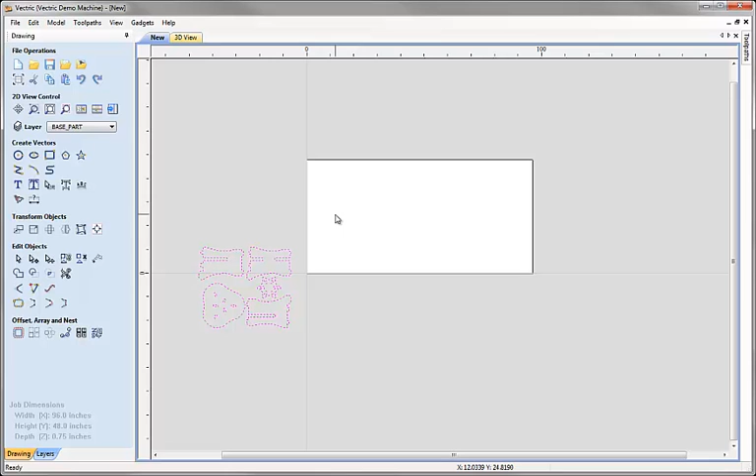Now if this happens and you can't see your data, then the best way to deal with it, assuming that the original position of the data is not critical, is to just center it within the middle of the part. So if we go back to our standard view so we can now see the data that's been imported, I'll show you the process that you'd use to center it.

To be sure that the data was selected, and it should automatically be selected when you import it, but just to double check that, in case maybe you've clicked off the data, you can come up to Edit, select all vectors, and then choose the Align Selected Objects icon from the Transform Objects area of the form, and come up to Align to Material and choose the middle of these 3 at the top here, which will align both horizontally and vertically within the part. And there we can see our data has been aligned in the middle of our job setup.

So we've seen how the position of the part can be affected by how it was saved in the original design system. In addition to that, for DXF and DWG files, you will also import any layer information that the part was saved with. If we come down and click on the Layers tab, we can see the part we've got here, and the three layers that the data is on.

We can tell which layers have data on by looking at this third icon for each layer and seeing if it's got the little shapes on it. That shows me that there's data on that layer. So layer 1 was the layer that we had in the software by default, so if we were to make that invisible, we'll see there's nothing that disappears.

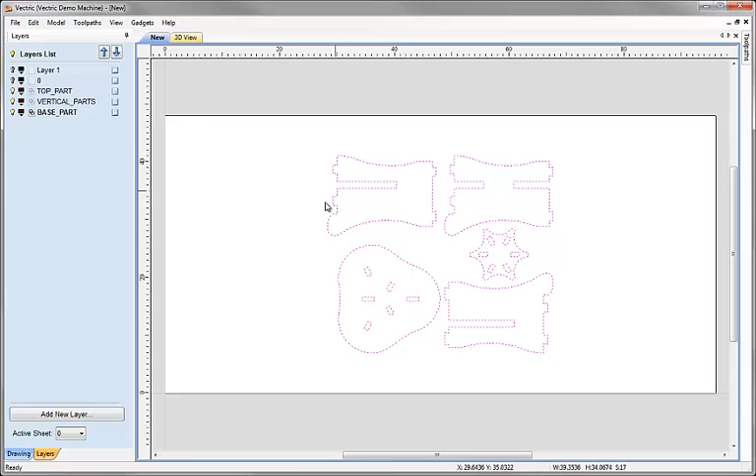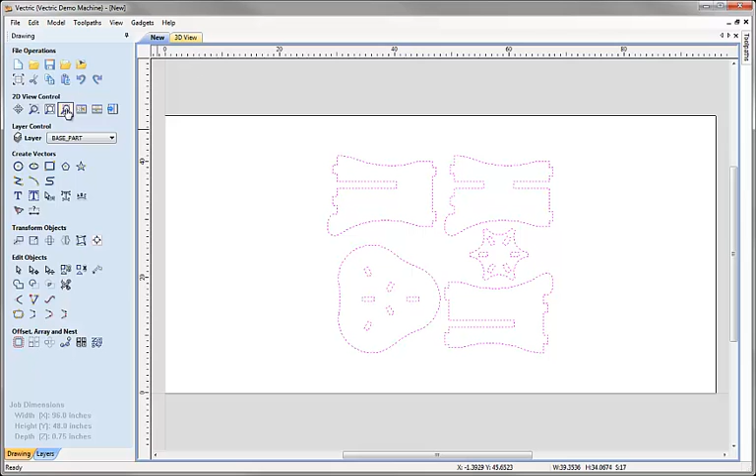So as we're not going to manipulate the layers in this case, let's come back down and click on the drawing tab and let's consider our design. What I'd like to do at this point is just zoom in on the parts I've got on the screen here. There's several ways we can do this. We can zoom in using the zoom box, or because we already have the part selected, I can click on this icon here to zoom selected, and that's just going to zoom in on whichever selected objects I have chosen in the 2D view.

So we'll click on that and we can see that just zooms in nicely on the parts we've got here. If we want to deselect the parts, we can just click in the white space, making sure we're not clicking on any other entity, and that will deselect anything that we've currently got selected.

So the design is intended to be cut out and slotted together. If we just take a quick look at the original design picture, we can see how we've got kind of a mortise and tenon arrangement. Each of these vertical pieces has got a little tenon on the top of it, which is designed to slot into the mortise hole in the flat horizontal parts in order for this piece to slot together.

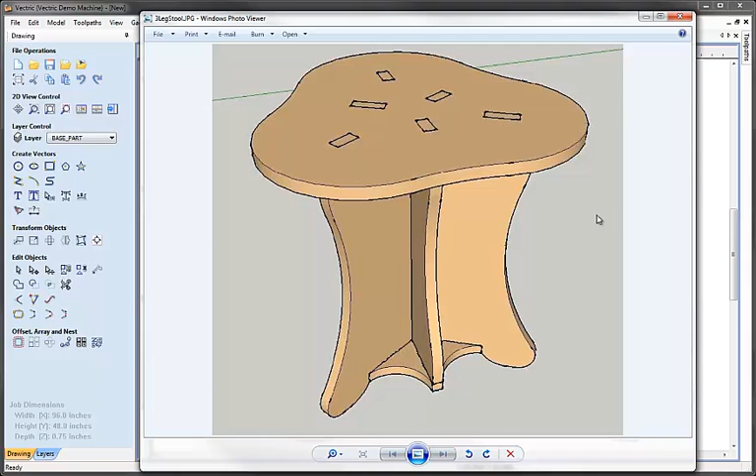In terms of the design, there's one element of this which is extremely important. We've set this part up to be cut out of 3/4 inch material. That means that when we cut around each of these parts, the tenons are going to be 3/4 inch thick, 0.75. That means that our mortise holes need to be made so they will fit together.

So each of these slots has been designed so that its width, its height, as we're looking at this one, is 0.75 inches. If I select that vector, you can see at the bottom here it's showing me the width and the height of that piece that I've got selected. It also gives me the layer information displayed here as well. So the idea is once these are cut out, that these will all slot together very snugly.

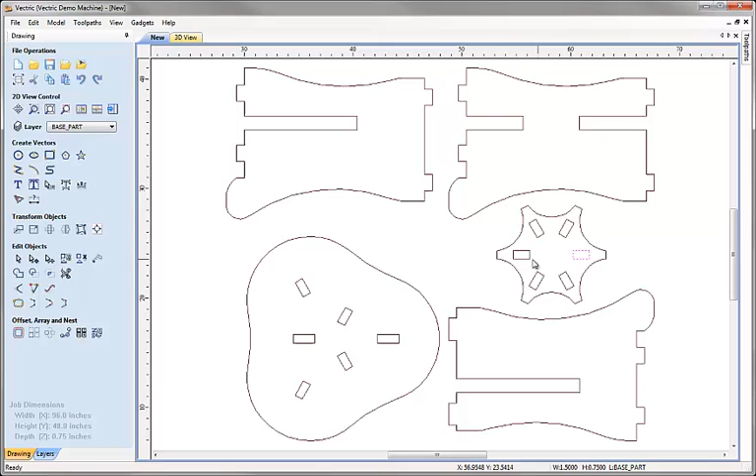Because of this relationship between the material thickness and the size of our mortise slots, if you were to change the material thickness, or if you were to measure your material and find out it wasn't exactly 3/4 inch, then you would need to come in and edit all of the mortise vectors. All of these internal vectors here would need to be changed so that their width or height, depending how you're looking at them, match the actual thickness of your material. Otherwise you wouldn't get a snug fit when everything was slotted together.

There's also another issue that we need to be aware of when we come to manufacture this. We're going to cut out around our tenons and then want those to slot into the mortise. However, when we cut our mortise out in here, what we're going to be left with is an internal radius.

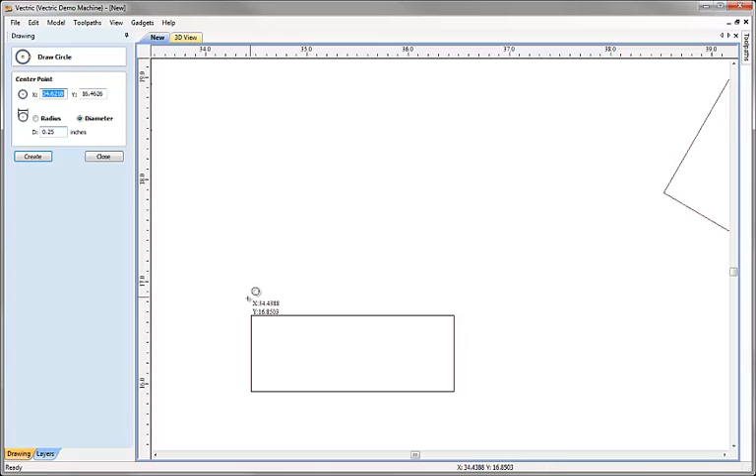If I draw a vector that represents the tool, so just a 1/4 inch diameter vector, and we were to bring that into the corner here, you can see that when this is cut inside of here, we're going to be left with this piece of material between the radius of the tool and this nice sharp corner. And that means that when we try and put our tenon in there, it's not going to fit. Now we could go round and hand finish everything if we wanted these to be like a true mortise and tenon joint.

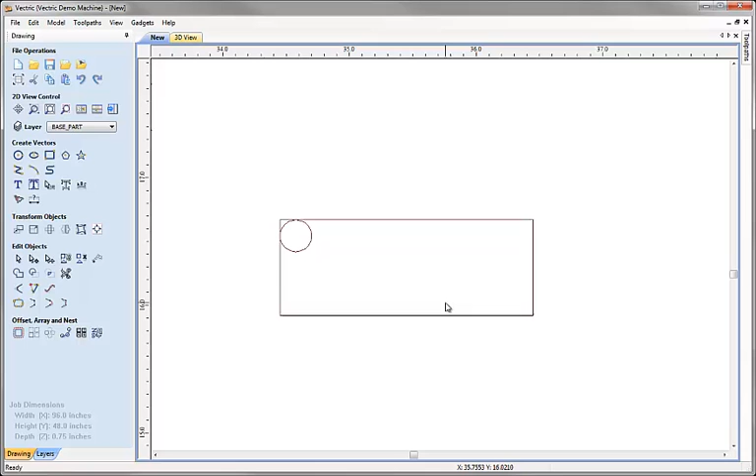Or one of the things we can do with a CNC machine is to introduce something called a dog bone or a T-bone fillet, which will allow us to machine these in such a way that the part will still slot together straight off the machine. So let me just delete my imaginary tool outline there. I'm going to come back so the parts are zoomed out so we can see everything on the job setup. And let's now look at adding some of these special types of fillets into the corners of our parts.

I'm going to select the outline for the top of the stool, and I'm going to go to zoom selected so we can see that clearly in the 2D view. And then what I want to do is come over, and from the edit objects area of the drawing tab we're going to choose this icon to create fillets. You can see there are a number of different types of fillets that we can add to our geometry. We've got standard fillet, and then the ones I'm interested in this case is the dog bone fillet and the T-bone fillet. And these are a special kind of fillet which is going to open up the corner and allow the tool to fit in and machine that out.

What that'll mean is we're not left with any material in that corner, and so our tenons will slot together perfectly with our mortise. The only downside of this is we are left with a little area around the corner where we are going to have a hole. So certainly there is an aesthetic penalty to this type of joint.

So here though I'm going to choose the dog bone fillet option, and what I want to do is specify the radius of my tool. I may even want to make it a little larger than the radius of the tool to give me a bit of an allowance. So here I'm going to cut this part out with a 1/4 inch tool, a 0.25 inch diameter end mill, and so the radius of that tool would be 1/8 of an inch, and I'm going to leave a little bit more than that, 0.135. So that'll just give me an extra little bit of play to make sure the tool will easily fit into the corners.

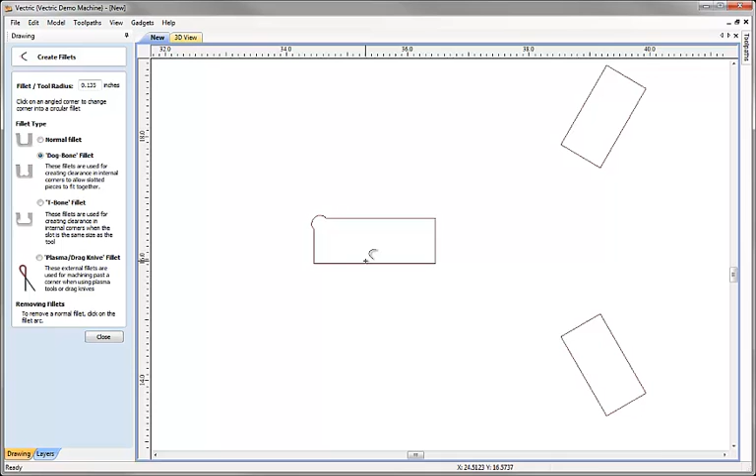To add a dog bone fillet, I'm just going to come over a corner, and it has to be a corner between two lines, and as soon as I move over that corner you'll see I get a little check mark appear on the cursor. So there, if I come up here you can see that check mark appear. Once I see that check mark, it means that the software's found somewhere where it's valid for me to add this type of fillet, and if I click it'll add that in there. So if I just roll the mouse wheel towards the screen, we can see how that's been added, and I could go around all these corners and add those dog bone fillets in.

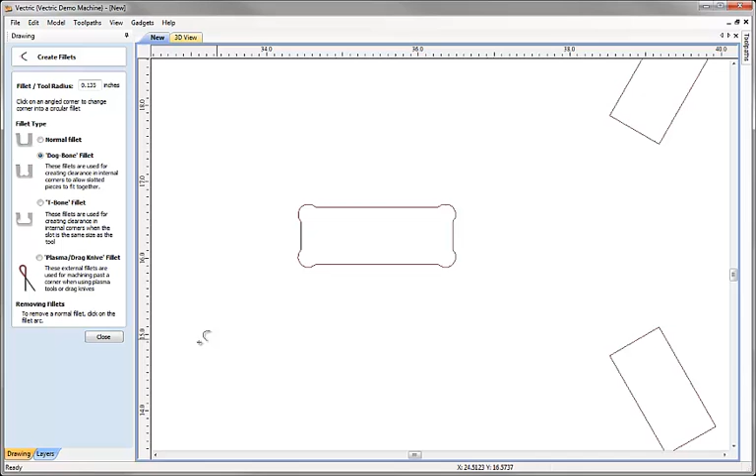What this means now is that my tool will go in and clear out that area, and so now when I slot my tenon in there, there's not going to be any material to get in the way of that fitting together and creating a nice tight fit. So now what I would want to do, if I zoom out here, is basically go around all these internal shapes and add this type of fillet to them. So I may zoom in very carefully, or here, as long as I'm close enough to see that it's a valid point and see when I make the change, so I know for sure that I've added that in there, then this is very easy for me to do. So I'm just going to click around all of these.

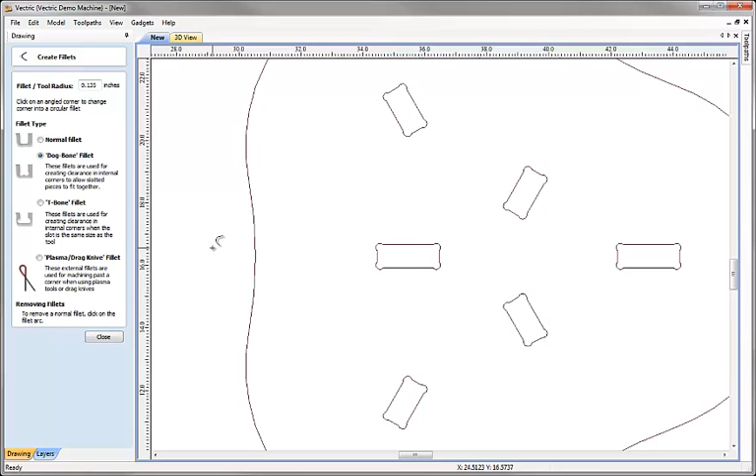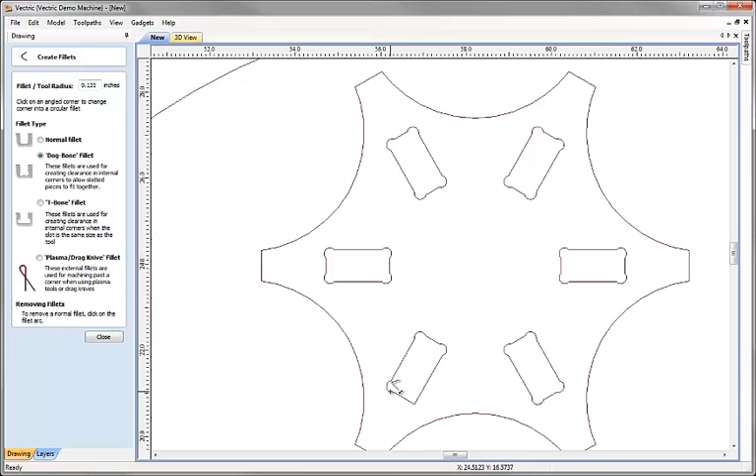Now I'm going to hit F on the keyboard, which is the shortcut to go back to fit the entire job on the screen, and I'm going to zoom in on the base plate area and basically go around and just add all these in as well. Now at this point you may want to go ahead and just pause the video if you wanted to spend a few minutes adding these in yourself if you're following along. I always need to make sure that I can see the check mark before I click to ensure that I'm going to add that correctly. So again, I'm going to hit F on the keyboard to zoom out again.

So related to needing these types of special corner fillets to allow the tenon to fit into the mortise, we also need them on the bottom of the tenon, if I zoom in here, to allow this part to fit completely up to the corner as well. Otherwise, if we have again a fillet of material left in here from the tool, then this isn't going to be able to go into the mortise until this surface fits flatly on the surface of this part. So we'll also need these dog bone fillets in all of these corners as well.

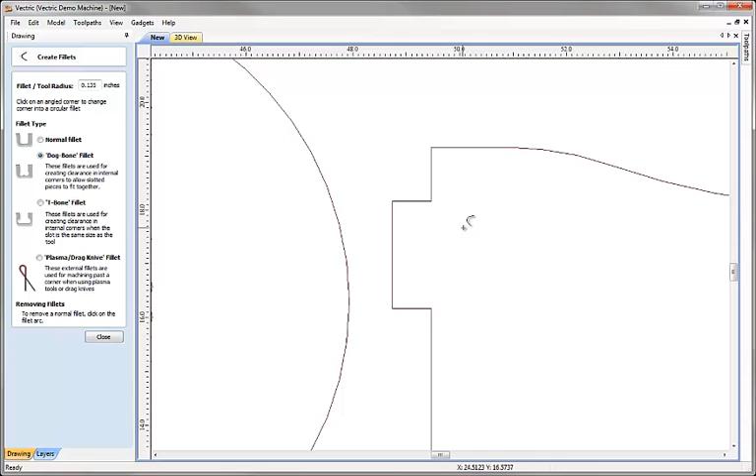So once more we might want to hit F on the keyboard, may just close the fillet menu for a second, take this, zoom selected, go back into the create fillets function, and using the same size, because we're going to use the same size tool to cut these out, we'll come around the outsides here, just add these into all these corners.

Let's hit F and then zoom in using the mouse wheel. If we put the cursor in the area we want to zoom in and roll it away from us, we'll zoom in. Again, we'll just come along and add it into each of these. Same on this side.

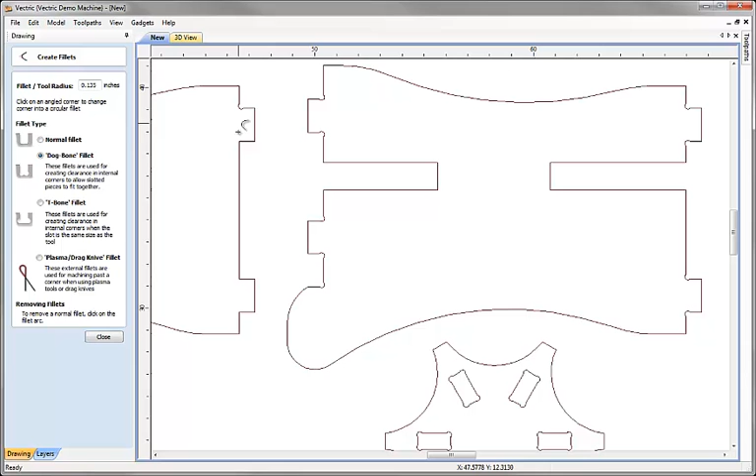Hit F to fit the window again, and then just zoom in on this one. Click our last few locations. Hit F. So again, you may want to pause the video for a second while you go ahead and add those in if you're following along.

And then there's also one other area where we need to add some of these in as well, and that's on these pieces that slot together coming down the middle of our part, so that the main vertical edges have this long vertical slot in them, which is all going to piece together, and we need to make sure that also in the corners here has some kind of way of allowing these to fit flat against each other.

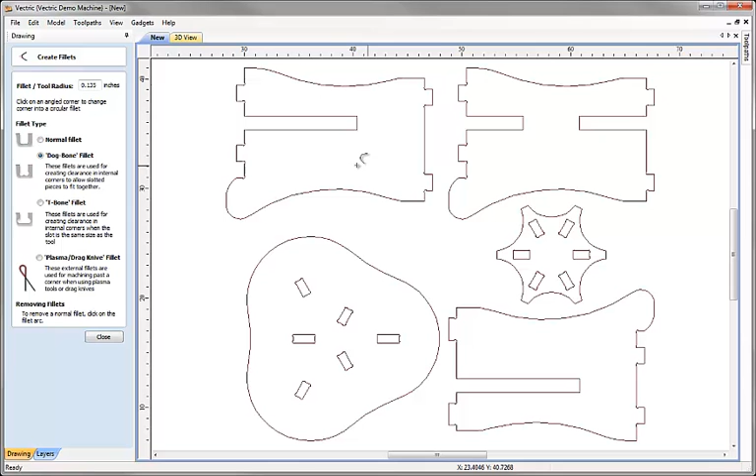So we can add the dog bone fillets into these corners as well, but I just want to show you the other type of fillet we've got for creating more space to get this type of joint in here. That's a T-bone fillet. Typically you'd use these where the slot was not much wider than the tool,

and so rather than having to have enough space where the dog bone might overlap enough that it would eliminate the flat surface at the bottom here, you can effectively grow the radius area out the sides to allow room for the tool in there to make sure that you still get this nice flat edge on the bottom. We could use it in this case, if we want, for aesthetic purposes.

So if I was to choose a T-bone fillet option here, in this case what it will do is require me to pick one side or the other to add it rather than the corner. So if I click here, it will add it sideways. If I was to click here, it will add it in this direction.

If we put it in the wrong place, as with any fillet, I can just come over it, and when I see the check mark and it shows me there, you see that I'm going to get the two straight lines again from the icon. So if I click on that, that'll just get rid of the fillet and I can add it back in on this side.

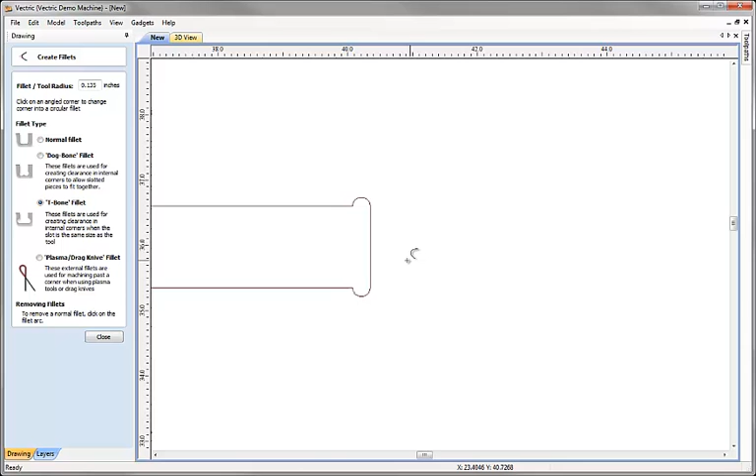So let's hit F to fit, come in and add these in here, here, here, and here, and F to fit, and then finish off by adding them in here and here. Hit close, hit F to fit again, then once more we'll just select everything and just click the icon to zoom selected.

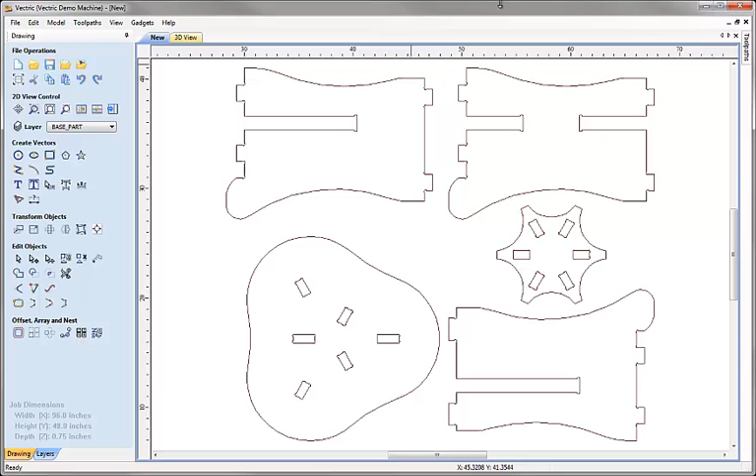So at this point we've added the special types of fillets into all the corners where we need to. If you want to pause the video for a second, you can go ahead and just double check and look around your part to make sure you've got them everywhere you need. Just zoom in and kind of scroll your way around in order to double check. It's always very important to make sure they're everywhere you need them to be.

And if you were going to make these stools at this point, it would make sense to actually go ahead and position this onto a single sheet and machine one as a prototype to double check it. Here I'm going to assume that we're happy with our design, that we've cut a prototype and it works okay, and I'm going to show you how we would nest this data in order to make multiple copies of the same object.

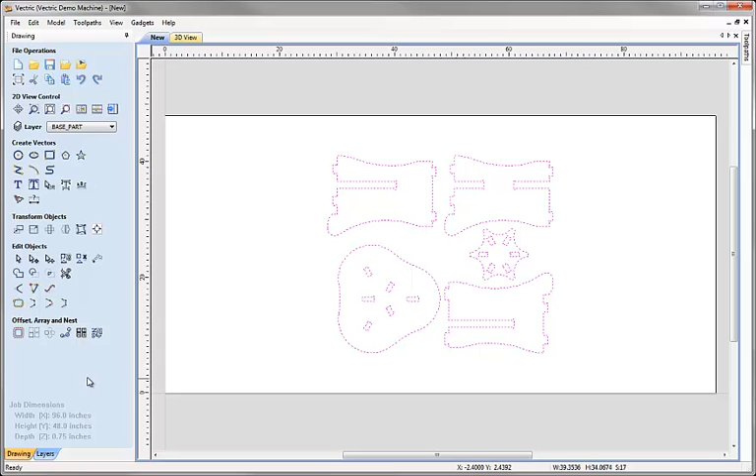So in order to nest our parts, we're going to select them. I'm going to drag a box around them with the mouse from the 2D view, come over to the offset, array and nest area of the drawing tab and click on the nest selected vectors icon. Within here I have a selection of parameters that I need to enter in order to define how the parts are going to be fitted within the material. There is a tutorial which specifically deals with the nesting if you want to review this function in detail.

In this case, the first thing I'm going to specify is the tool diameter. I'm going to use a 0.25 inch end mill in order to cut these parts out. So I'm going to tell the software that so that it knows what spacing to allow for, and then I'm going to tell it I would like an additional 0.4 of an inch spacing to allow a bit more material to be left between my pieces when they're cut out.

Not going to specify a border gap. What that would do is allow extra material around the edge of the part if I was going to clamp it or screw it down. In this case, we'll imagine we're holding the part down with a vacuum, so we don't require that.

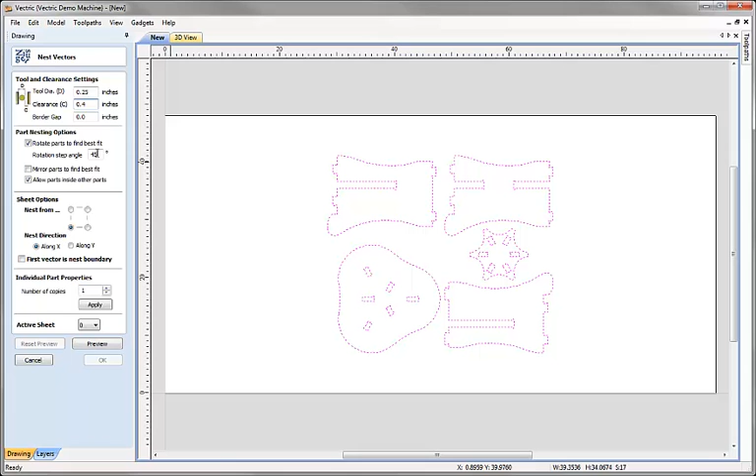Going to let the software rotate the vectors up to 45 degrees to allow them to fit or to create a better fit. And then it's just a case of choosing from these other options here as to whether I allow the parts to mirror, allow parts inside of other parts, which I'm going to check off, although with this design there's not really enough space for that to happen anyway.

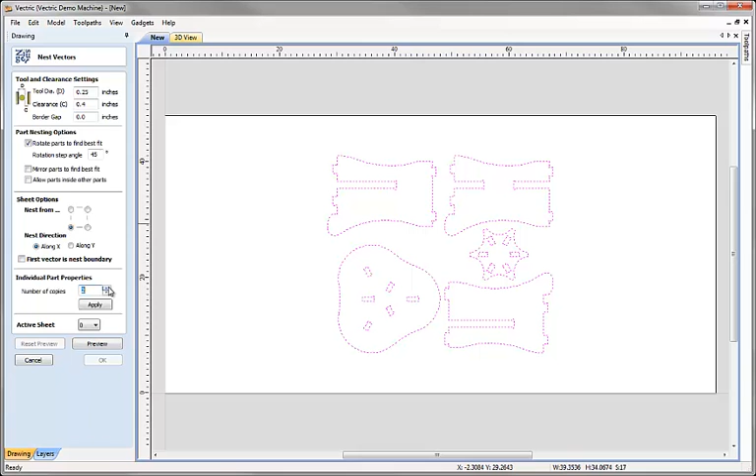Then I'm going to nest from the lower left corner, and I'm going to nest along the x-axis first and see how that looks. In this case I would like 3 copies, so I can either enter that, or if I hit the up arrow I can get 3 copies. I can hit apply. The software will show me the pieces that are going to be nested and how many times they're going to be nested, and at this point I can hit the preview button.

When I preview this, it's going to show me, based on the parameters I've set, how the software thinks it can fit those particular parts within the material specified. So you can see in the 2D view 3 copies of our stool design. You can see 3 tops, you can see basically 3 sets of 3 for the vertical parts here, and then you can see 3 of these base pieces.

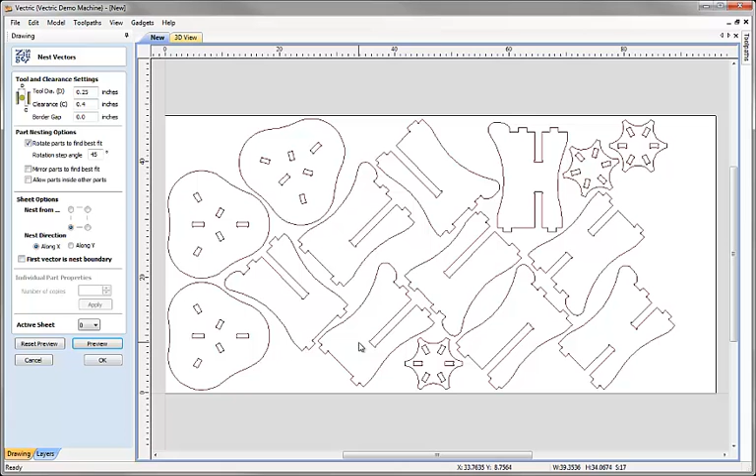Now it may be that we'd actually like to nest more copies. This will fit in a single sheet, but maybe I'd like to see how well I could nest 6 copies of this. So we could click on Reset Preview. That'll take us back to the point before we hit the preview button. We could say that I would actually like to see if I can cut 6 stools, hit Apply and Preview.

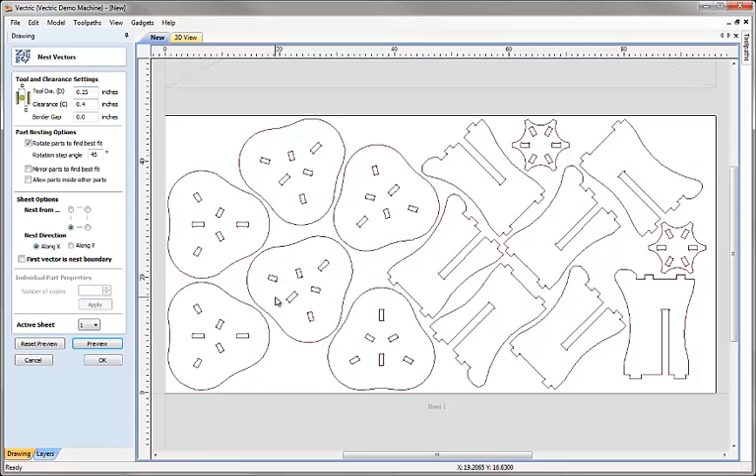What that's done now is it's created multiple sheets. We know that we wouldn't be able to fit 6 copies of this on one sheet because we were only just able to fit 3 copies of it on there. But if we were to click in here and just zoom out now, we can see that what we've created is this additional sheet of material when it's done our nesting.

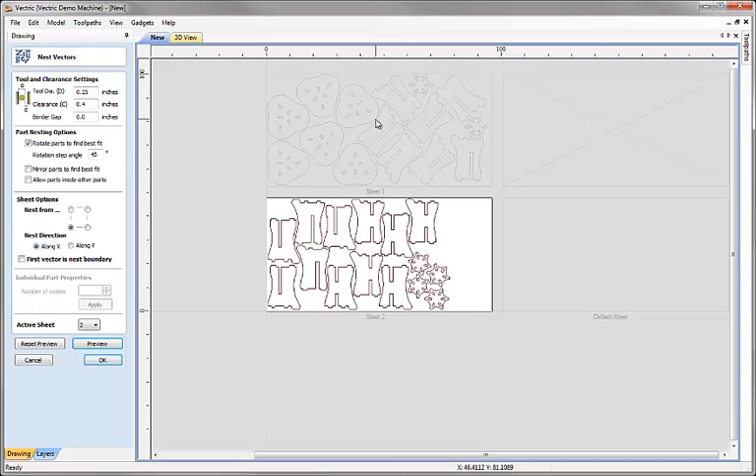If we want to look at that sheet within the area of our material, we can either click from the option here, or we can just double click in the 2D view to alternate the data that is currently in the area where we're going to machine. In the companion video to this one, we'll show how we'll generate toolpaths for this part, swapping between the sheets to create different toolpaths for the different pieces of material that we would cut.

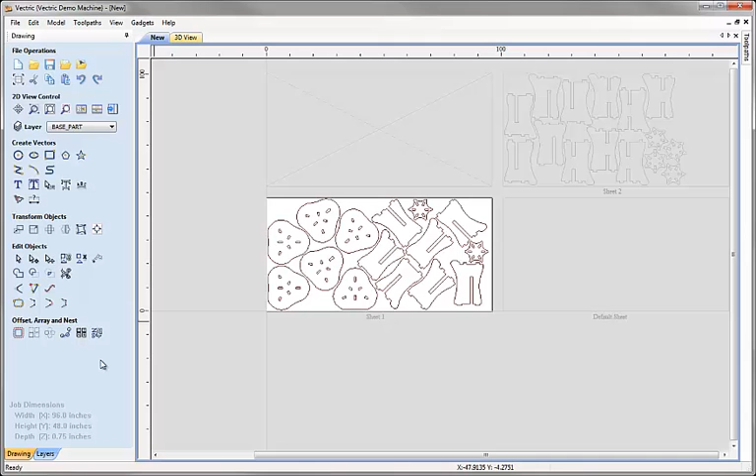In this case I'm happy with the way this is nested, so I'm going to come down and click on the OK button. We'll save this file, come up to File, Save As. I'm going to save it in the project folder, and I'm going to call this 3-leg stool vector.crv, and that's a file we'll open in the companion video and create toolpaths on.

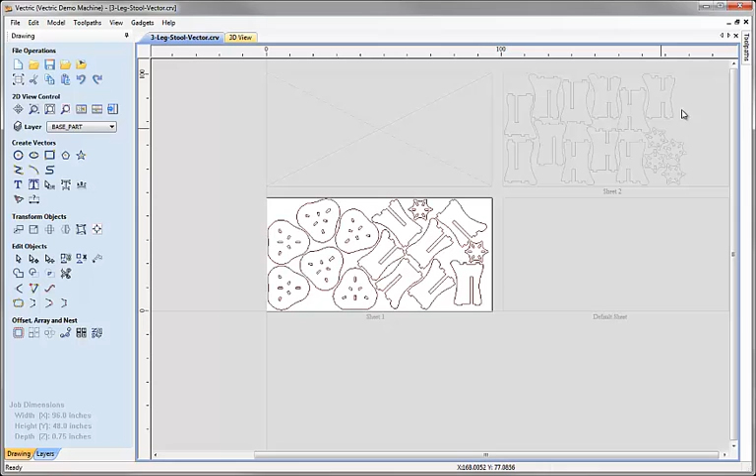So just to summarize some of the things we've looked at in this particular tutorial. We started with setting up the job and importing the DXF file. We showed you that potentially a DXF file may come in not within your work area, so you may need to adjust that, and also the fact you may pick up things like layer information from the part, and again just to be aware of that.

Next we discussed the idea that the way this part had been designed was to slot together, and how when we introduce the radius of the tool to cut this part out, we're going to create areas of material which would not be cleared out if we were to try and slot them together without allowing for them. The way that we allowed for them was to show you the dog bone filleting tool. So we went in, and on each of the corners where we needed to relieve that material and make sure the tool would be able to get in the corner and not leave a radius, we added those fillets.

We went round all those internal corners on the part, and then we showed you how we could generate the layout for this part if we wanted to create multiple copies of it. So we're able to enter 3 copies to fit on a single sheet, or ultimately what you can see on the screen here is the fact we've entered we'd like 6 copies of it, and use the nesting to automatically generate the layout ready for us to do the toolpaths in the companion tutorial.